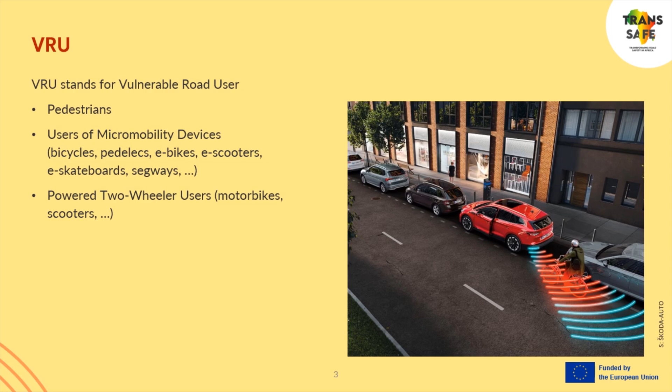Among the vulnerable road users, or abbreviated VRUs, we count pedestrians, users of micromobility devices such as bicycles, pedelecs, e-bikes, e-scooters and so on, and last but not least, the users of powered two-wheelers — motorbike drivers and scooter drivers.

The majority of accidents are caused by human mistakes. The statistics talk about 90 to 98% of all accidents, the rest being technical or other issues. Very often accidents are caused by distraction - many drivers give more attention to their mobile phones, for instance, than to monitoring the traffic situation.

The role of advanced driver assistance systems is to mitigate human errors, either by avoiding accidents or by mitigating accident severity if the accident is not avoidable. These systems can help the driver, but he cannot rely on them - the driver is still responsible for the driving and also for the accident.

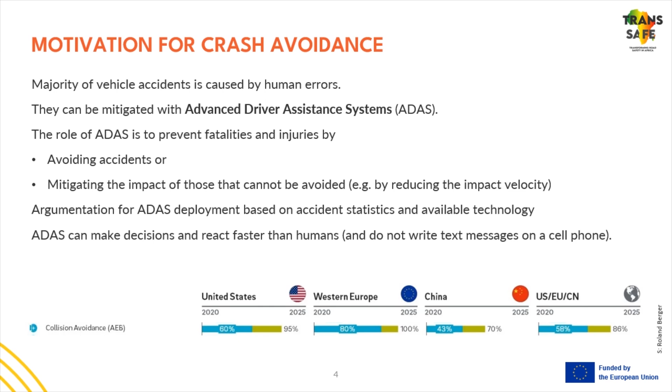Since advanced driver assistance systems contribute to traffic safety, in some regions they are becoming mandatory. On the graph we can see some prediction of the penetration of ADAS systems in different regions. In Europe, for example, they will be required by legislation - that's the reason why we have 2025 at 100%.

Here we have some examples of advanced driver assistance systems which should mitigate human errors with vulnerable road users. The first one is the front assist. Front assist automatically brakes before an obstacle, such as a pedestrian or cyclist, for instance.

The next one is the side assist, or we can call it lane change assist. In the case that the driver is going to change lanes, he gets a warning of a vehicle, for instance a motorbike, in the blind spot of his mirror.

The third one is the door opening warning - a warning when opening the door if a vehicle or cyclist is approaching us. And last but not least, we have the rear maneuver assist, which brakes the vehicle in the event that there is an obstacle when reversing.

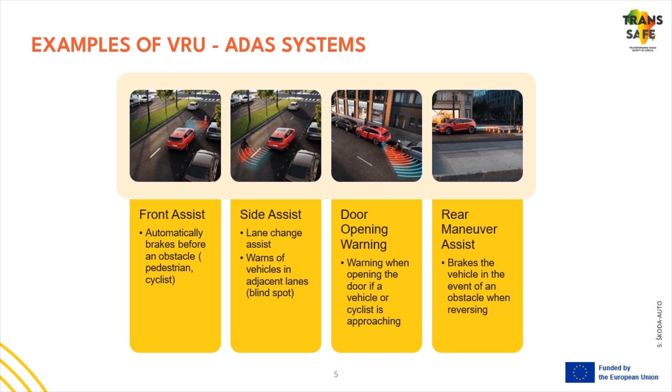What are the typical interventions? Actually we have seen two basic types: either the driver gets a warning through acoustical, haptic or optical information, or in the second case the vehicle intervenes in the driving, for instance by activating emergency braking.

What are the main functional blocks of the ADAS systems? First we should observe the surrounding, and for that we use sensors - this is the block called perception. Second, we have the block called decision making, in which effective algorithms propose some solution. At the end, we should implement this solution via actuators to the vehicle hardware.

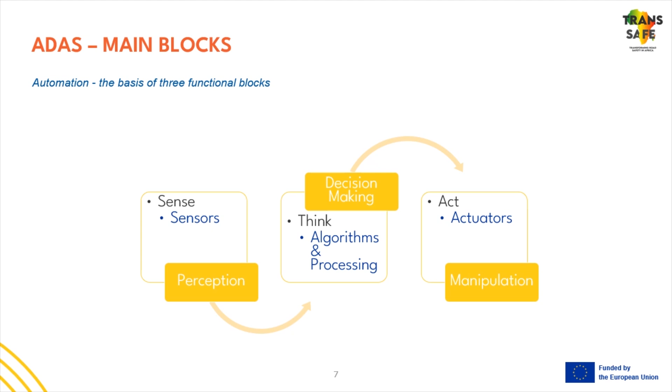This slide presents the typical setup of sensors for advanced driver assistance systems. What we can see are ultrasonic sensors for short-range identification of obstacles, usually supported with 4 cameras to get a bird's-eye view. Furthermore, we have radars in the corners of the vehicle for short and mid-range, and for long range we have a radar and camera in the front of the vehicle.

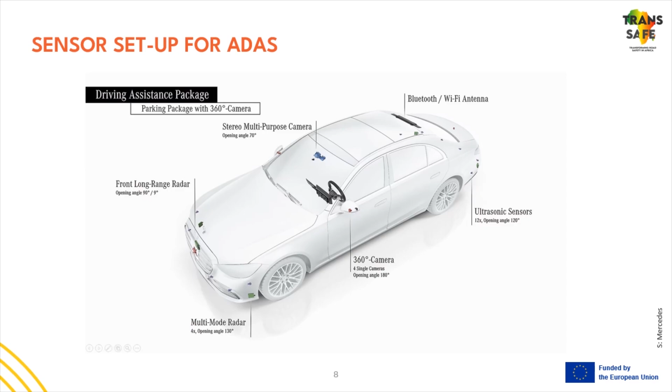From the point of view of advanced driver assistance systems to mitigate collisions with pedestrians and other vulnerable road users, there is already some legislation. This is the General Safety Regulation, valid now since 2022, bringing in a couple of phases the requirements for the systems. For testing, this General Safety Regulation refers to the UNECE Regulation 152 in the case of vulnerable road user protection.

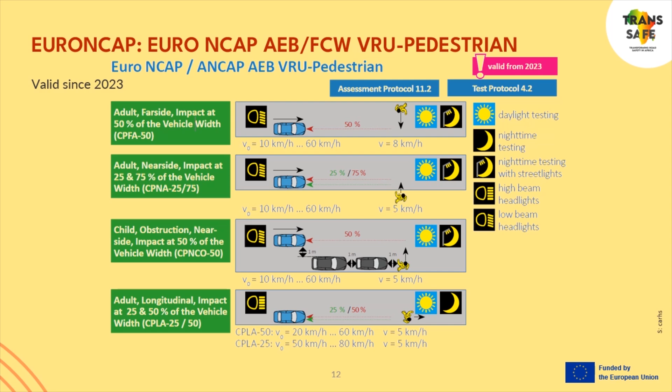The next slide continues with the tests required by Euro NCAP, with reverse driving, and also what we have seen in the video with the junction, with the crossing and the pedestrians crossing the road.

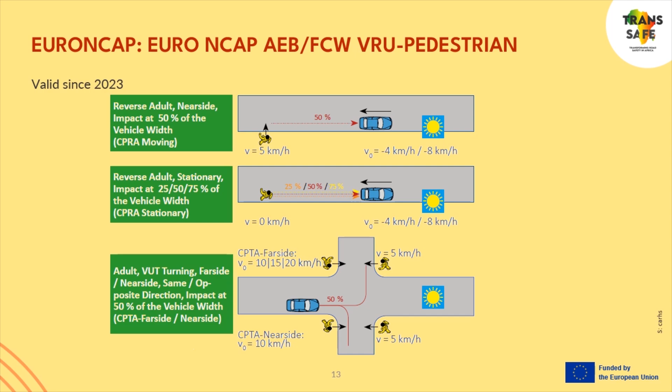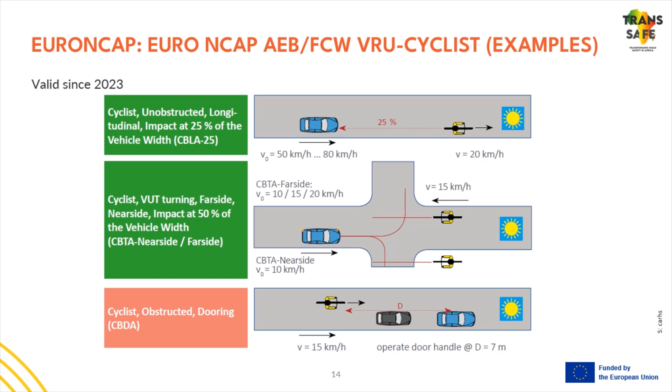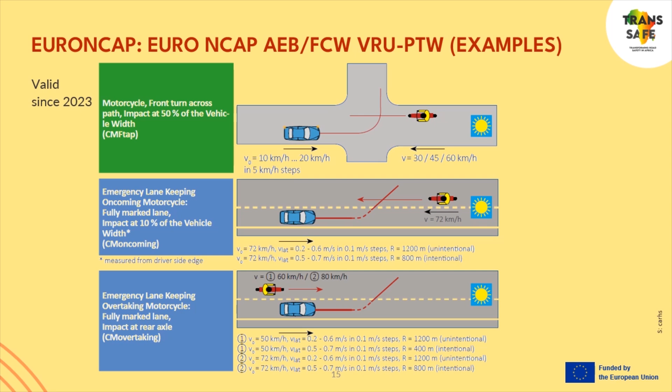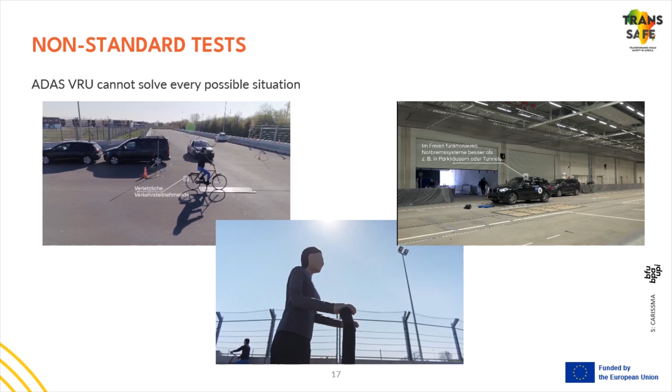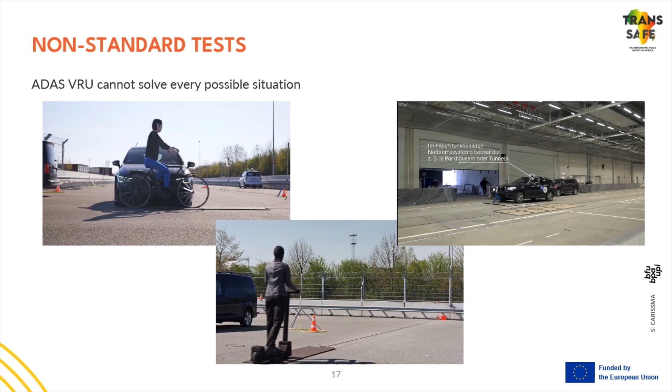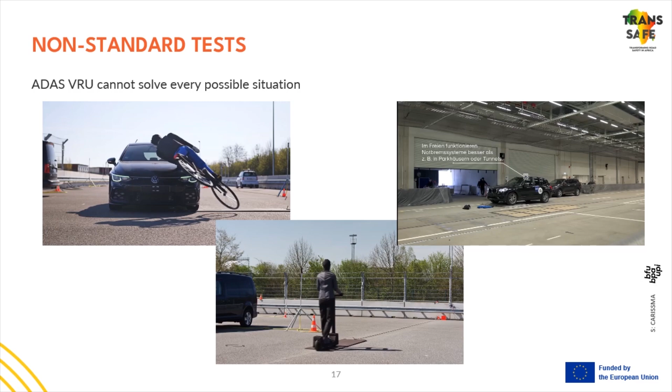But the systems are being designed for those tests, and if we go for some non-standard testing, as for instance here with non-standard speeds and non-standard distances, or here in this case with non-standard environment, this is a typical environment in which we have a lot of reflections, or some different types of road users. In this case it's a micromobility user. The system cannot react as expected, and this is the reason why I mentioned at the beginning the driver is still responsible. He cannot rely on the system. He must let the system support him but not let it drive the vehicle.

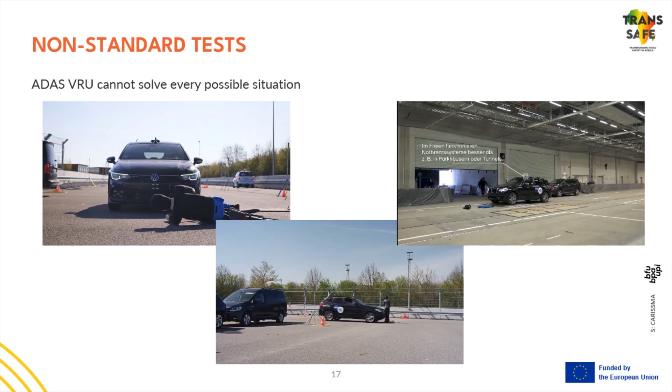Now we are coming to the conclusion of this presentation. We wanted to share some information about the protection of vulnerable road users with crash avoidance systems, or advanced driver assistance systems. We can say that the advanced driver assistance systems with functions to protect vulnerable road users do have an important contribution for the reduction of accidents with vulnerable road users. The accidents are often caused by driver mistakes, for instance driver distraction, playing with the mobile phone instead of driving.

The systems are just assistance systems. It means I cannot play with my mobile phone even if I have all the systems in the car. This can be done later on in automated driving with higher levels. It means that with assistance systems, I cannot rely on them. I should keep the responsibility for safe driving as a driver. The advanced driver assistance systems, nevertheless, do have big potential to avoid accidents or mitigate the impact by reducing the impact velocity, meaning the severity of the accident will probably be lower. In Europe, the systems are being tested by the consumer testing organization Euro NCAP since 2016, and next year are becoming mandatory for all new models, and from 2026 for all sold vehicles in the European community.